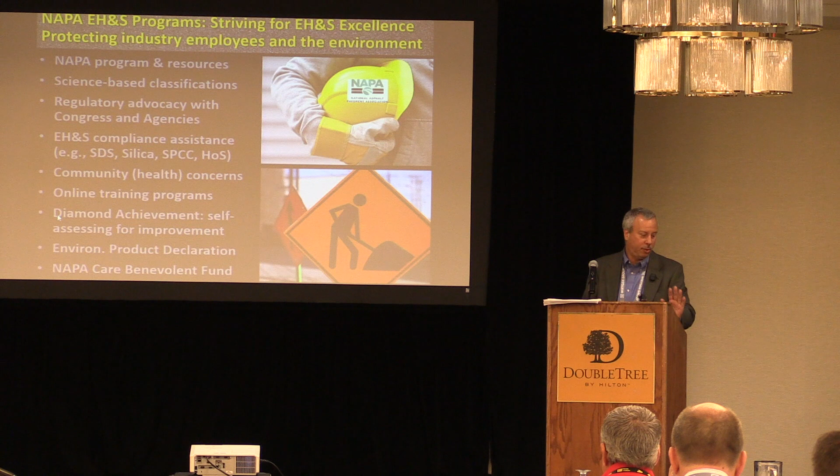We have things like an environmental product declaration, which probably doesn't affect what you all do, but we do provide other types of guidance for regulatory compliance to help our members.

So with regards to today, we're talking about the silica rule, and there's three things I want to focus on. Dave did a great job on the obligations and implementation dates. The construction part of that rule is in effect right now. We do have a number of different guidance documents on our website, and I encourage you to take a look at those.

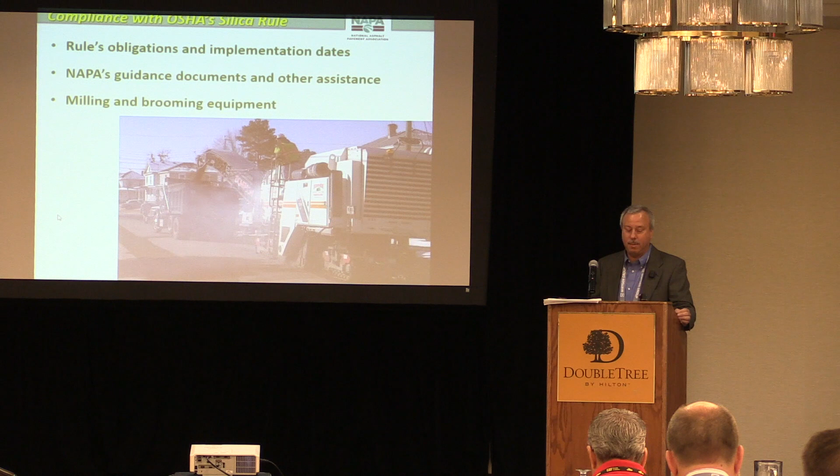I want to talk a little bit about the milling activities and the brooming activities, which your ARRA members probably don't participate in as much as some of your other activities, but that is for road construction contractors. That is a big issue, and that needs to be addressed. I was talking to David a little bit earlier today.

As David indicated, silica exposure is definitely a known health hazard, and it's a priority for the agency. The rule was decades in the making. It was finalized recently, and what it basically does is cut the exposure level of respirable crystalline silica from 250 micrograms per cubic meter down to 50. So it's a pretty substantial cut, going from 250 to 50 in the construction industry.

The proposed rule, as David indicated, went through a whole bunch of processes with the rulemaking. The proposed rule initially would require, for example, respirators during milling operations and a statement that there be no visible dust. That's been changed due to some of the data that we provided the agency.

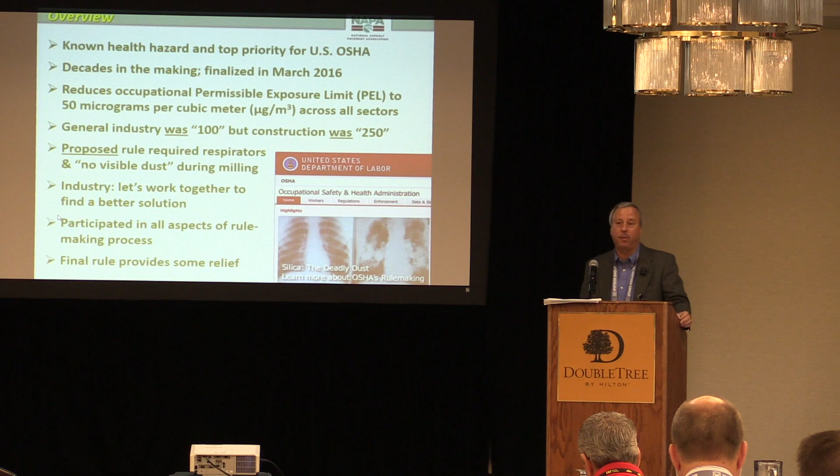As David mentioned, we participated in a government, labor, industry partnership where we identified the best types of controls to use in milling machines. Here's a shot during one of these 'mill fests,' as we call them, where we had all these different manufacturers of mills out on roadways, tearing up some roads, or actually tearing up some airport pavements, and we looked at what those controls would do.

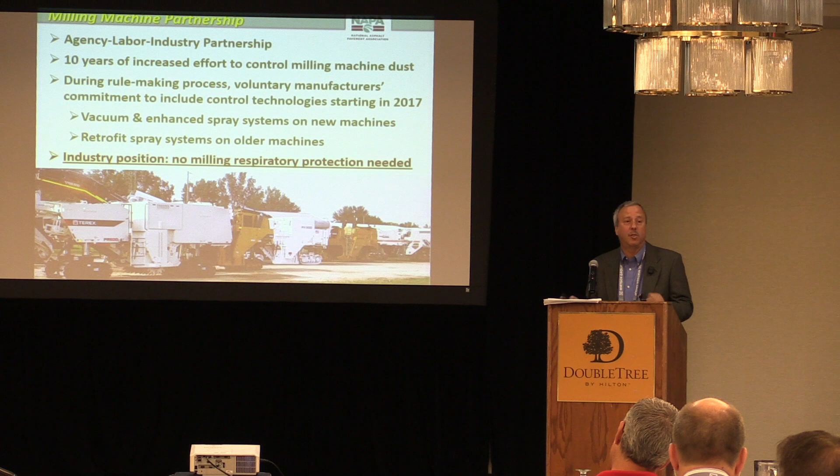It was a 10-year partnership, and basically, from our perspective, it resulted in the agency being comfortable enough with those controls that individuals associated with milling operations would not have to wear respiratory protection, which in my opinion is a huge deal.

Again, the big picture on the final rule: it sets this PEL, their standard, to 50 units from 250. Construction compliance is now in effect, and general industry compliance—for those that operate in general industry, like asphalt plants—will be in June of next year.

Many of you have probably heard about a variety of different efforts to halt the rule. I do not think that's going to happen at this point—those efforts really never panned out. The basic premise of the rule is these specific engineering controls identified for a whole bunch of different kinds of activities, jobs, or tasks, found under Table 1.

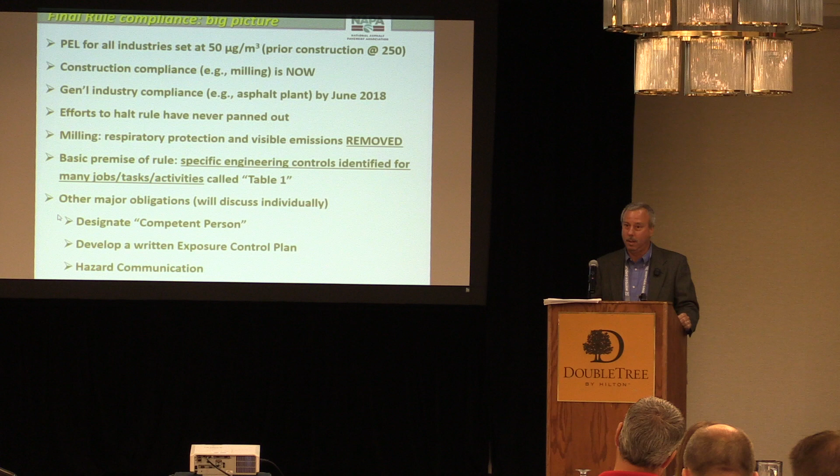There are three or four other major obligations of the rule, regardless of whether or not you follow Table 1. Those include designating a competent person—very important, everyone's going to have to do that—developing a written exposure control plan, which I have an example of, and communicating hazards appropriately as part of a hazard communication program. So in my mind, that's the big picture of what the rule is.

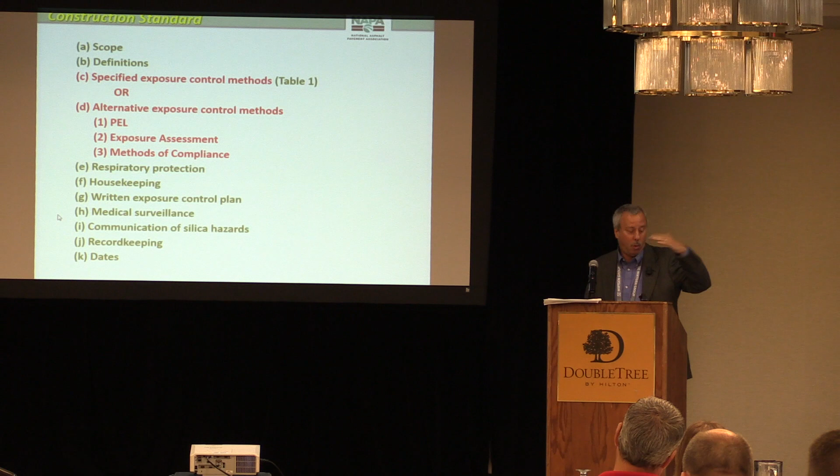You saw this earlier. The red is basically just these specified exposure control methods, like Table 1, or you can monitor your employees. I'm not going to go into those.

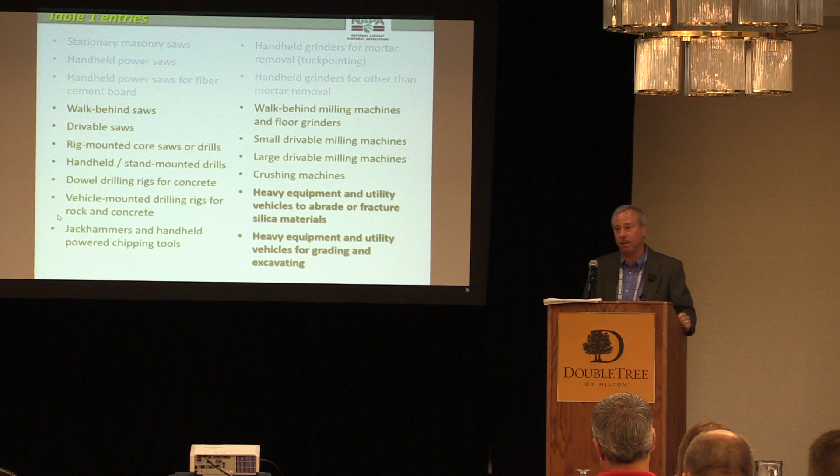Here's a different way of looking at the entries on Table 1. The stuff that's bolded out would have more applicability to road construction activities. Here's a good example of following Table 1 versus not following Table 1.

In general, these Table 1 controls would involve activities that require a water suppression system, for example, possibly a vacuum system in some examples, and also possibly an enclosed cab in some situations. If the table requires an enclosed cab for a piece of equipment, there are a couple of other subparts to that requirement that have to be followed.

For example, you have to have a special HEPA-like filter on it. You have to ensure that your seals are working properly. It has to be pressurized. You have to have air conditioning and heating—is that correct, David? I think that's part of the standard, right? And also, there's a housekeeping part of that, too.

If that employer chooses not to implement those engineering controls, they can do that, but then they'd have to measure the exposure of those particular activities and make sure that exposure is below a certain level. In my opinion, it would have to be below the action level because, as David indicated, once it goes above that 25 units, a whole other bunch of stuff kicks in.

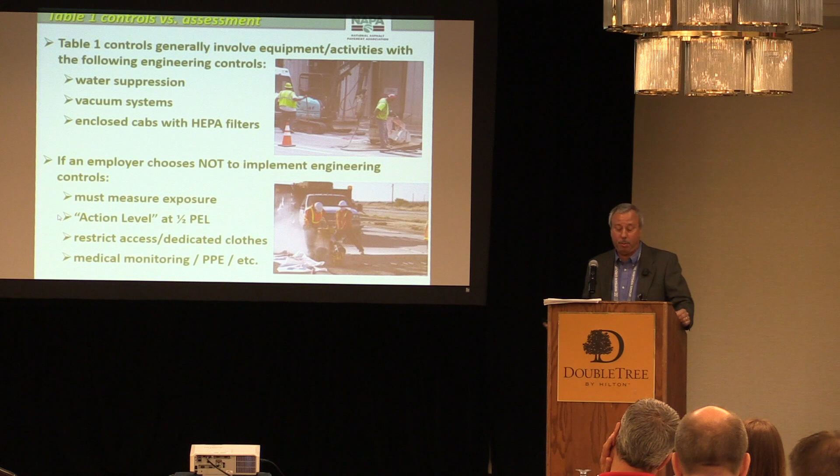Milling operations and controls. David had a table that showed it; I've done it in a little different format. I think it's pretty straightforward. There's no allowable controls for milling greater than 4 inches of concrete at this point.

All the milling machines today, as of a voluntary commitment starting January of this year, a lot of milling manufacturers were putting both pieces of control equipment on their machines - that's a vacuum system and an enhanced water suppression system internal to the machine. If you have both of those controls, you can cut any depth of asphalt.

If you want to retrofit your equipment and don't want to retrofit with a vacuum system, which would be more expensive - I think the full retrofit kit might cost somewhere between $10,000 and $15,000 - but if you just do the enhanced water spray, it's much, much less. If you choose to do that, you'd only be allowed to mill up to 4 inches in any pavement.

I know some companies are specifying that they don't want to cut greater than 4 inches so they only need a water suppression system, and for anything greater than 4 inches, they'll contract that out so someone else has to put that additional control equipment on those mills.

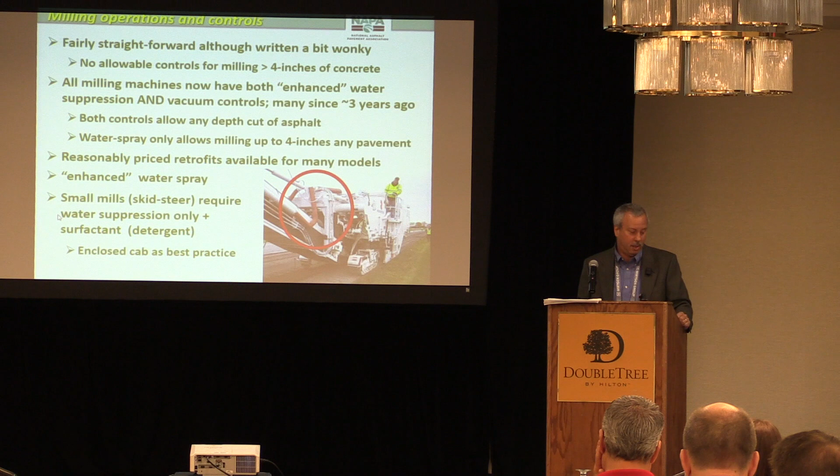Small mills, as David indicated previously, like the skid steer mill, would require a water suppression system and a surfactant or detergent. I think of an enclosed cab as a best practice - it's not necessarily required, but I know a lot of skid steer mills have enclosed cabs. I'd say that's a best practice.

Here's a comparison on brooming and sweeping. I'm going to limit my comments on this one because it's a little controversial and not probably as applicable to this industry, ARRA members, as it would be on the road construction side, unless I'm mistaken. Just curious, by a show of hands, does anybody in this room have assets that operate power brooms? Well, you do. Okay, let me talk a little about this.

Under Table 1, there are two entries at the very end - I think it's 17 and 18, is that correct, David? Basically what they say is, if you have these heavy pieces of equipment and utility vehicles that either abrade or fracture silica-containing materials, or they don't abrade or fracture that material, then there are two kinds of things that would need to be done.

If you're abrading it, the standard says you need to have an enclosed cab and a water suppression system if ground crew are present, but you would need to have an enclosed cab on that piece of equipment.

If you're not abrading silica-containing materials, the standard says you would either have to have a water suppression system, or you could have an enclosed cab if the operator is the only one engaged in the activity. So in general, it's my understanding, since I'm not in the agency, that a water suppression system covers everybody to a certain extent - people on the ground, including the operator of the equipment.

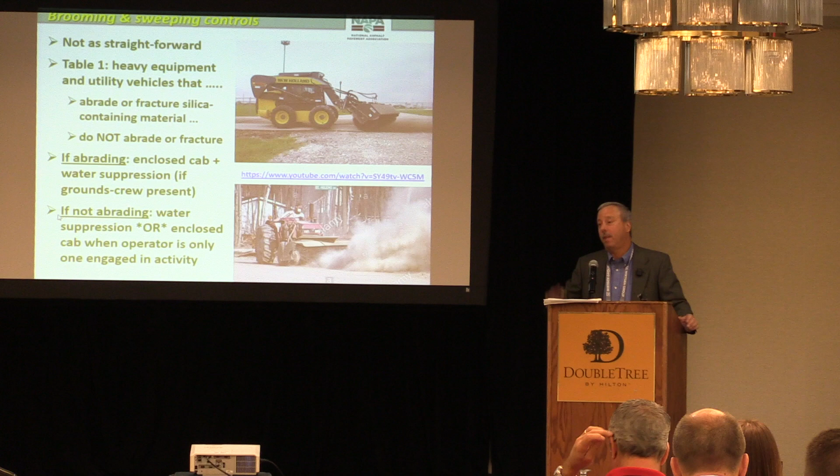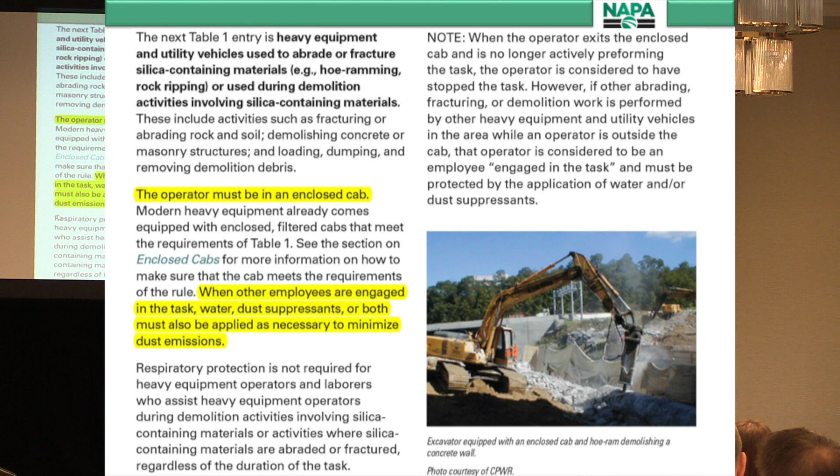It provides a number of different examples. So in this case, it talks about this Table 1 entry about heavy equipment that abrades or fractures, and I've highlighted the pertinent issues. If you're abrading or fracturing material, like a mill would kind of do, then the operator would need to be in an enclosed cab, and when other employees are engaged, then you'd have to have a dust suppression system. It gives some examples of those activities: fracturing or abrading rock and soil, demolishing concrete, loading, dumping, and removing demolition debris.

This is also the companion part to that, part 18 I think it is. So this would be heavy equipment utility vehicles for grading and excavating, for example. They include earth moving, grading, excavating, other activities, moving, loading, dumping, things like that.

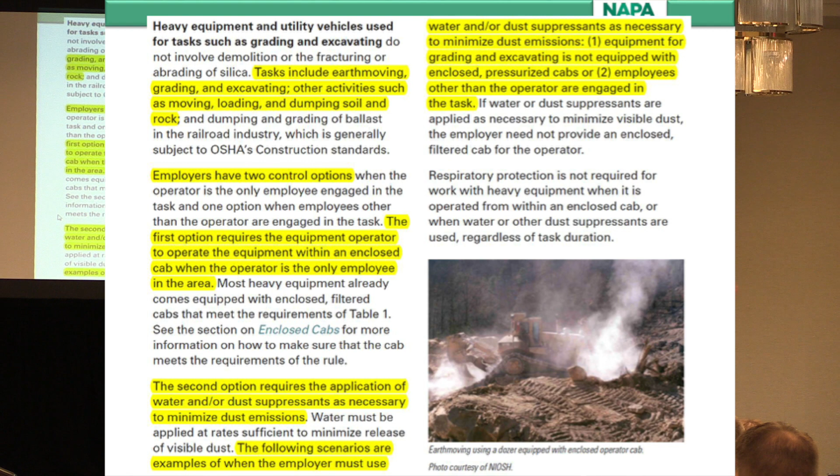Employers have two control methods. As I mentioned, the first one would be to put the operator in an enclosed cab if there are no other people on the ground, or they would have to have a water suppression system. You could have that enclosed cab as well, but you would need that if there are other individuals associated with that activity on the ground.

David also mentioned exposure assessment kind of thing. So I say OSHA requires exposure assessment when you're using non-controlled equipment or when it's not in Table 1.

An employer needs to understand this thing called an 8-hour time-weighted average. It's taken over an 8-hour typical workday. Silica does have a low PEL, but it still would allow for elevated short-term types of exposure. For example, if you're just going to have saw cutting activities, and let's say they're dry saw cutting, even though OSHA prohibits it, I know some state agencies require dry saw cuts. If that's the case, and you might be doing this activity 2 or 3 times during an 8-hour workday, if you know what those exposures are, you can calculate what that 8-hour time-weighted average is. You may or may not be below the PEL, but that's a situation where you would need to monitor for that.

OSHA allows alternate methods of exposure assessment as well. David mentioned this. I particularly like to utilize something called a real-time dust monitor, with the understanding of what the silica content is in the material and the airborne dust. There are some pretty good publications out there which identify that. These monitors are pretty inexpensive.

You can rent them daily for about $150 a day. It comes pre-calibrated. You can walk around to different activities and understand what the respirable dust levels are, and then if you have some additional information, you can identify where activities may have increased respirable crystalline silica content, and if that's the case, you might want to do some more formal monitoring. But this is a good first cut at what your activities are and what you need to focus on a little bit more.

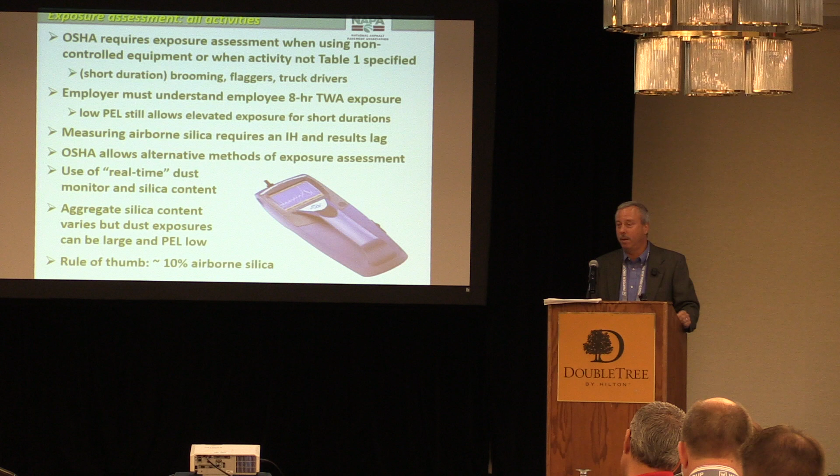So I've given you an example where you might have an uncontrolled brooming operation like below. It would be relevant if this was not considered under Table 1, if it's a short duration or non-specific activity - like brooming, flaggers in a dusty environment, truck drivers. Again, the important thing is to have those individuals remain below that action level of 25 units. You can use these real-time monitors to get an idea about what that is.

All this should be part of this exposure control plan and reviewed by your employer's designated competent person on the job or the company. I'm going to talk a little bit more about that in a second. It would require some type of exposure assessment for these types of activities.

And I put the word 'but' in there because I am not a big proponent of going and monitoring individuals, because once you start to stick monitors on individuals or do some sampling, there are a whole bunch of record-keeping requirements as part of other OSHA standards where you're going to have to maintain this information for 30 years - I think it's actually 30 years past the date of employment for an individual. So there's pretty substantial record-keeping requirements once you start to monitor individuals. That's why the beauty of Table 1 is, if you have equipment with these types of controls on it, you don't have to do all that other stuff.

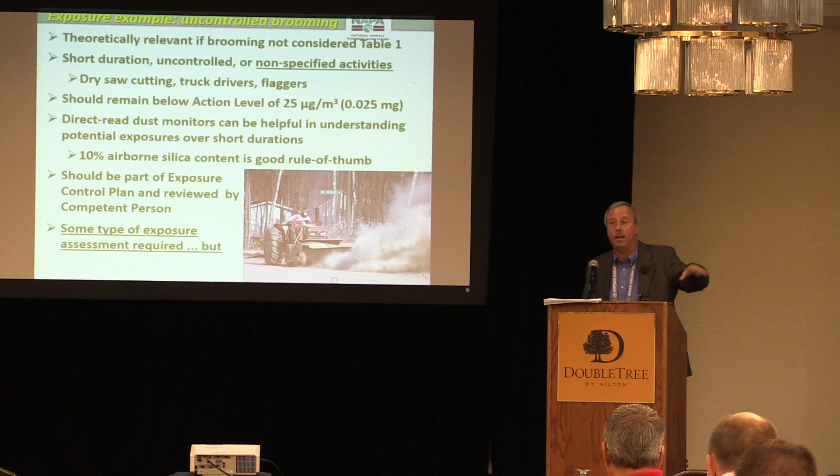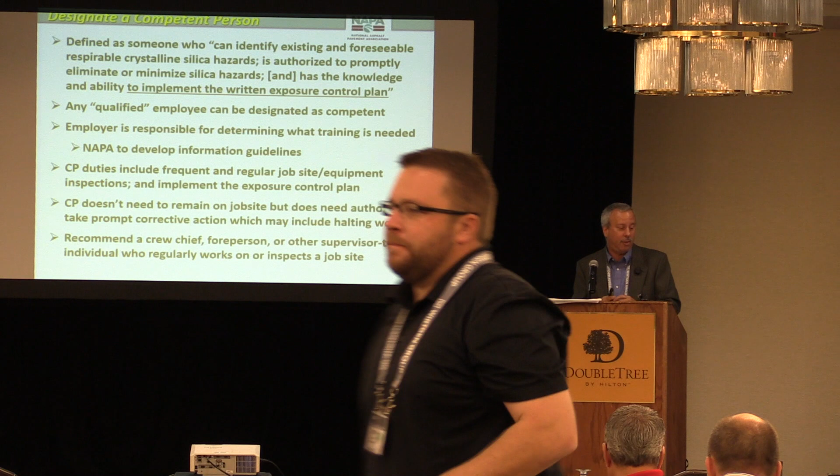Designating a competent person. A competent person in the standard is defined as someone who can identify existing and foreseeable silica hazards, and this is important, is authorized to promptly eliminate or minimize those particular hazards, and has the knowledge and ability to implement the written exposure control plan.

You need to take this seriously. If you are a company out there doing road construction work, you have to make sure you have designated an individual as a competent person. NAPA has some training materials that are free that you can get from our website, or you can give me a call or send me an email. I will point you in the direction of how this thing goes together. But you need to do that.

The competent person duties would include, four bullets down, frequent and regular job site or equipment inspections, and again the implementation of that exposure control plan. They don't have to remain on the job site, but they do need to have the authority to take corrective action, which potentially could include halting work. I personally recommend a crew chief, a foreman, or another supervisor-type individual who regularly works on these job sites or has the potential to inspect pieces of equipment or the job itself.

Written exposure control plan. Again, this is an employer responsibility, they have to develop these things called a written exposure control plan that then can be implemented by the competent person. It can be generic, it doesn't have to be project specific, but it could cover all kinds of roadway milling activities with a large mill, saw cutting activities with this kind of configuration, or whatever. Those have to be in this written exposure control plan. I have a couple of examples in a second.

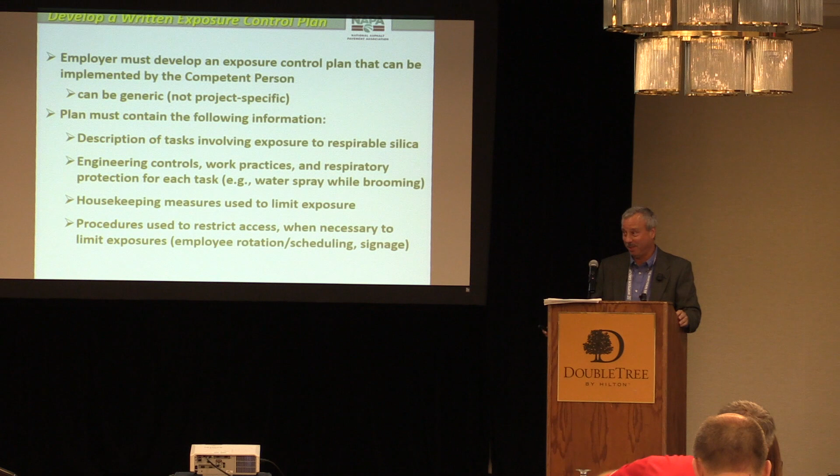And David, please correct me if I'm mistaken on anything that has to do with compliance obligations, because that's the last thing that I want to tell anybody is incorrect information. So I'm close. Okay, all right.

I'd suggest, if you haven't gone, take a look at this website, silica-safe.org. You can create an exposure control plan right off of this website for a variety of different activities. Pretty straightforward. I'm going to just walk real quickly through this, but I would say spend some time looking at it, it might be helpful. It's basically check-off boxes, and then it kind of self-develops this kind of plan for you. And it gets emailed to you. You got to put in some information, I think you have to register, but it doesn't really go anywhere. There's all these boxes you got to fill out. Pretty straightforward, I think it works pretty well.

Also, I did pull up an example of a written exposure control plan by, I believe it was Michigan's OSHA, and they have something that's out there for people to utilize. I have taken the liberty of filling this one in particular out. These are blank when you get them, but I've kind of filled them out so that you can see how something like this might work. So you get the company name, you have the competent person or the person completing the plan, and you've identified the competent person, and now you're talking about a location or a job site. So in this case, it says all road construction projects where existing asphalt pavement surfaces will be milled using a half-lane or larger coplaner mill.

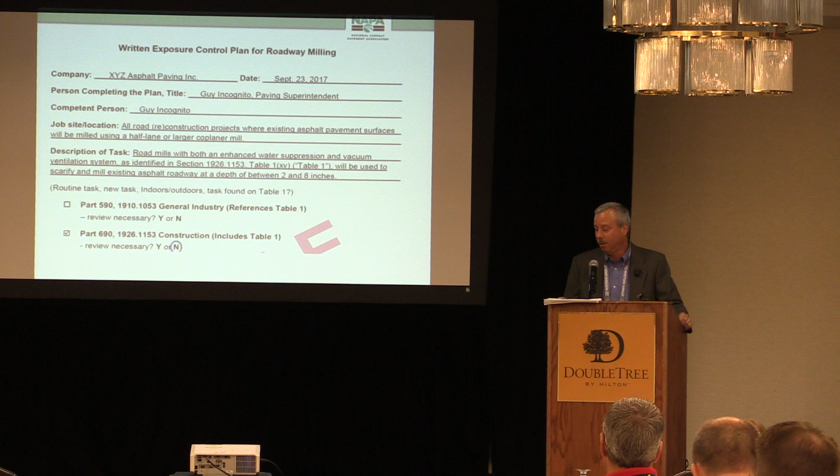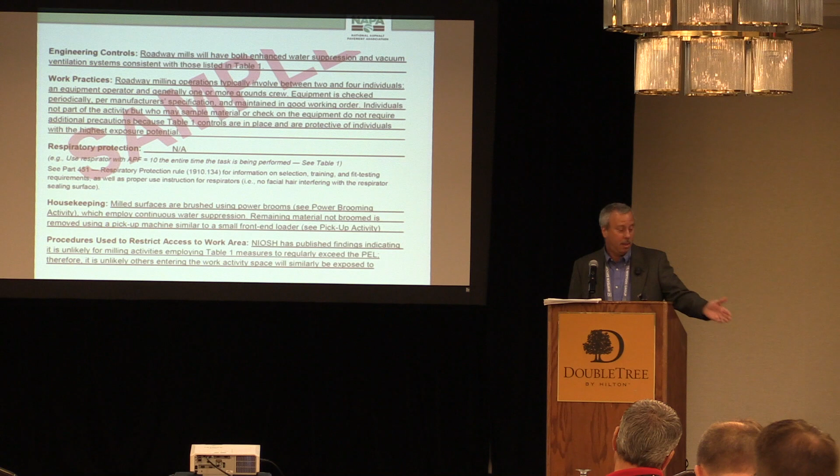Table 1, description of the task, pretty short, filled out, check some things off there. I can give you access to this kind of written plan at this point. It talks about engineering controls, what they are, how they're implemented, work practices, has a little bit of description about work practices, housekeeping, restricting access, it's all there. All that information that's required to be on an exposure control plan is there on one to two pieces of paper. You need to have that, though. You have to have it either in that kind of thing or other forms. You got to have a written exposure control plan.

We talked a little bit earlier about the inspectors or enforcement of the silica standard. Road construction work is pretty visible, especially during the day. And with the silica standard, in my opinion, if an inspector sees a dusty situation, because all of these exposure controls are minimizing the dust, not so that there's no dust, but greatly minimizing it, if an inspector sees this huge cloud of dust coming up from somewhere, in my opinion, there may be questions as to, hey, what's going on? We really shouldn't be seeing that amount of dust.

Have you implemented controls for the silica rule? Who's the competent person on the job? Someone better know who that is. Do you have a written exposure control plan for these activities?

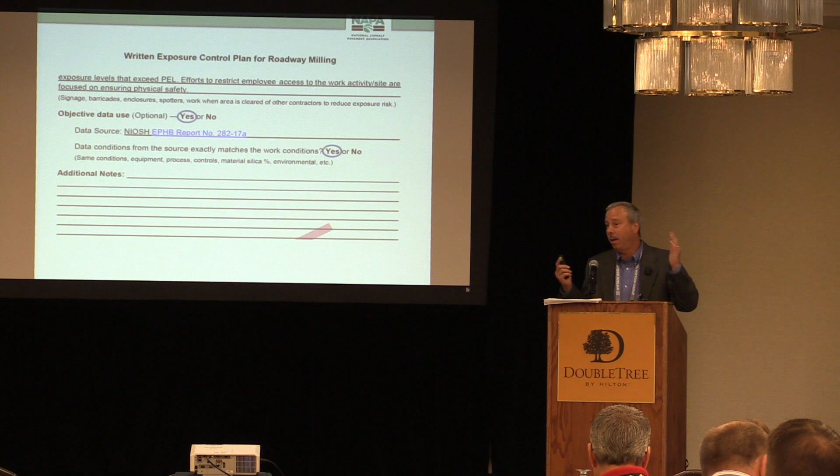So I would say, be prepared. I don't think there's going to be targeted enforcement really. There's gazillions of different kinds of construction jobs going on - saw cutting, demolition, all kinds of stuff that inspectors can be viewing. But in my mind, if an inspector, an individual, or an employer sees a dusty situation under this new rule, it kind of raises the specter of, hey, what's going on? Are there appropriate controls?

Hazard communication and record keeping, the last two kind of things. Got to comply with OSHA's HAZCOM rule. You need to train the workers on recognizing silica hazards and on workplace protections and things like that. They have to know who the competent person is, and medical surveillance program if applicable - hopefully it's not applicable.

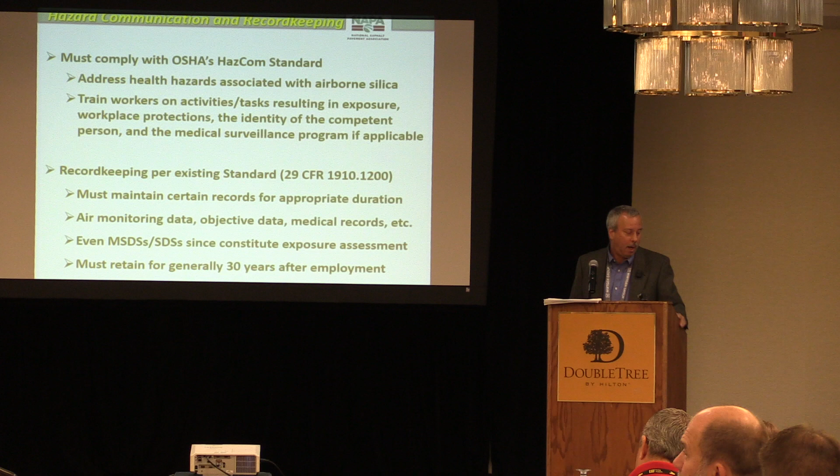Record keeping standards are identified by that citation there. You have to maintain these records for the appropriate duration, like I said, 30 years after employment. That includes air monitoring data, objective data, medical records - it's my understanding, and even theoretically, MSDSs or safety data sheets, because it's my understanding that some of that may constitute a medical exposure record. Is that right, David, on the SDSs? Yeah, the SDSs are exposure records if there is no other exposure data. Okay, so 30 years. Put them in a box, mark them.

So here's my last slide. Compliance for construction activities is now. I don't think it's going to be halted. Everybody was kind of holding their breath, but I don't think it's going to be halted. It requires employers to identify these job task exposures.

Milling partnership was very successful. They are going to require controls - they're already built into the mills. Brooms probably going to need water suppression in an enclosed cab. We do have a lot of data coming in from brooms that shows water suppression is extremely effective, especially with a surfactant, and especially after it follows a mill that has these new pieces of control equipment on it as well.

I don't know if people have kind of seen this, but milled material now with the new pieces of control equipment is wetter, clumpier. And if you follow that with a broom that has that water suppression system on it, there's really no dust at all. The data is kind of backing that up at this point.

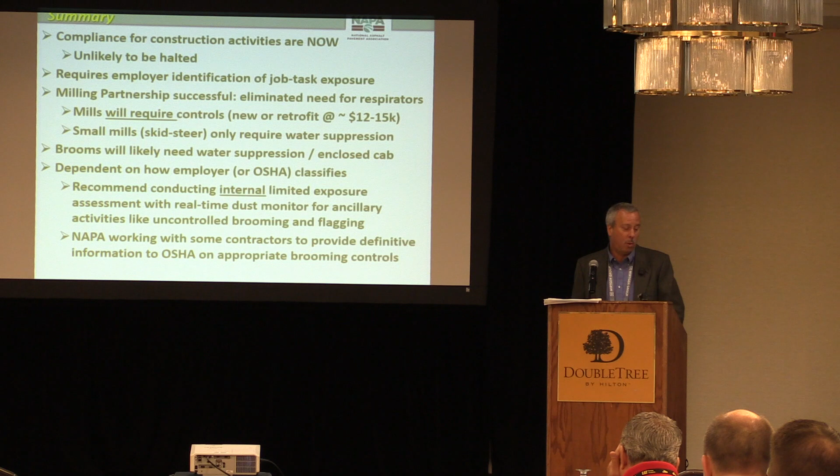Brooms will likely need that water suppression, enclosed cab. Again, it's dependent on how the employer or OSHA is going to classify these types of utility vehicles or heavy pieces of equipment. I talked to David a little bit earlier - we're working with some contractors right now to get some objective data across the country.

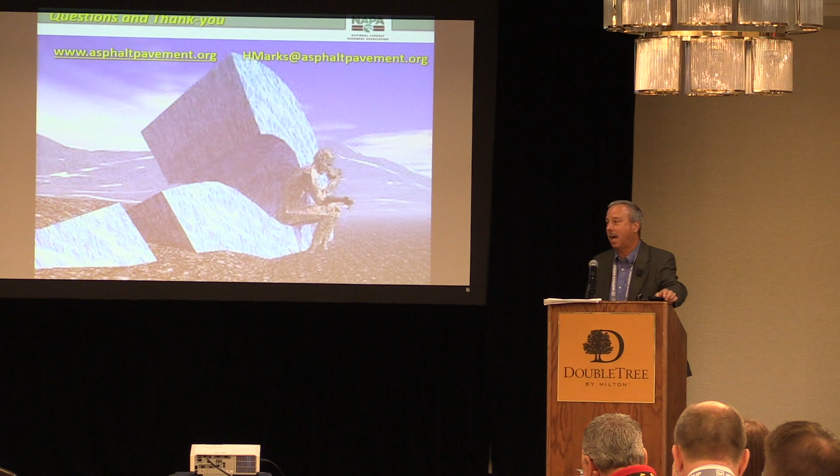And so with that, I think we have a little bit of time. If anybody has some outstanding questions, let's hear what they are at this point, if you feel comfortable. Yeah? I got two.

One - is the competent person required on the job, or just required to be designated in the company? I'm going to give you my opinion on it, and David will correct me if I'm wrong, but according to the standard, a competent person is not required on the job. It can be one designated individual, like a safety leader or something in an organization, but that individual would have to have the ability to inspect the job site frequently - whatever that means - and has the ability to halt work if necessary, or change activities, or whatever. So it's not per job, it's not on the job - it can be an individual at a company level. The language in the standard is frequent and regular inspections, so the competent person needs to make those frequent and regular inspections. The standard doesn't specify that they need to be on site at all times, or specify the frequency of those inspections, but they need to make regular inspections such that they're ensuring that the controls are working effectively.